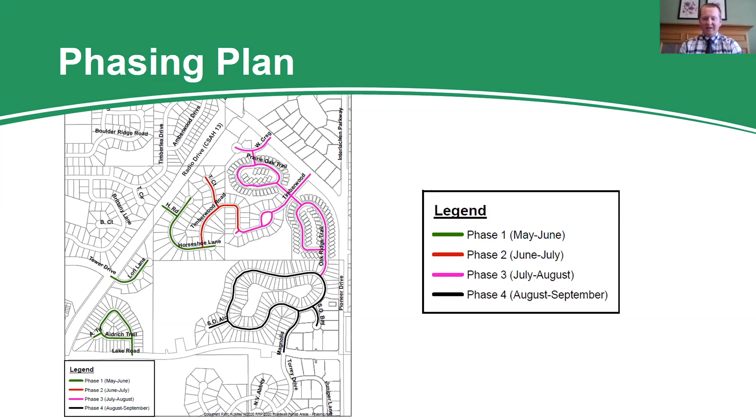So when we talk about phases, this is what we can expect. They'll generally take 6 to 8 weeks per phase, depending on weather and other factors. The first week generally consists of putting up signs for traffic control and doing utility repairs with any manholes. Some phases have more of that than others.

After that's completed, we get into removing and replacing damaged curb. Removing the curb takes a couple of days, and placing the curb takes a couple of days, but really the longest time is waiting for that curb to cure, which usually takes about a week.

While that curb is curing, we don't allow vehicles to drive over it. So if there's new curb in front of your driveway, you'll have about a week where you won't have access to your driveway. After the curb is set, we get into removing the pavement, grading the gravel, and placing the bottom layer of pavement.

That will take a week or two. After the bottom layer of pavement is placed, we will patch the driveways if they were damaged during curb replacement. Then we get into topsoil restoration and seeding, and finally the top layer of pavement will be placed.

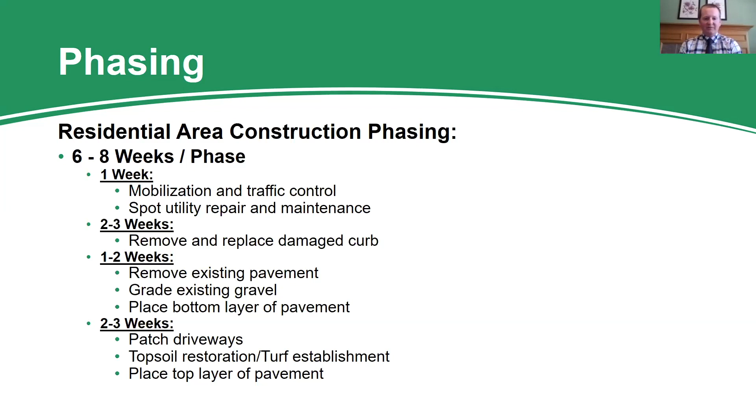We've shown this map at a few different meetings, but if you haven't been to those, this shows generally what the proposed improvements are going to be. This project will consist of a handful of different things: some trail rehabilitation, some new trails, some spot curb and mill overlay areas, spot curb full depth areas, full depth pavement areas, and full curb and full depth pavement areas.

The full curb and full depth streets being rehabilitated include Horseshoe Lane, Timberwood Court, and Timberwood Road between Horseshoe Lane and that small cul-de-sac. The spot curb and full depth street construction includes Lori Lane, Aldrich Trail, the rest of Timberwood Road, Prairie Oak Trail, and Oak Ridge Trail. The mill overlay area includes Savannah Oaks Lane, Savannah Oaks Bay, Magnolia Lane, and Savannah Oaks Alcove.

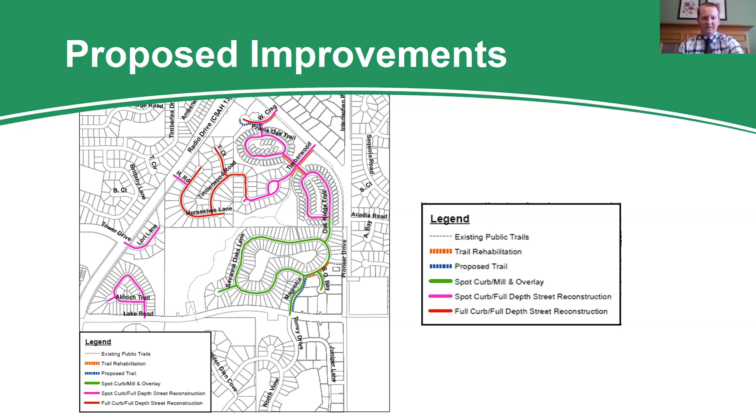We'll show you a quick video here showing the general construction process, and I'll go into these in a little more detail after the video.

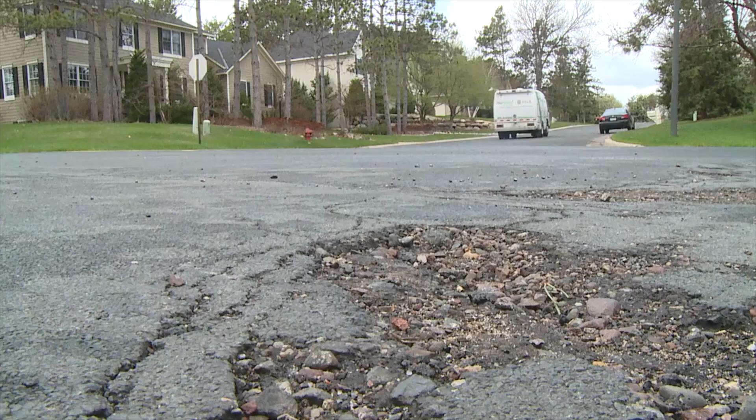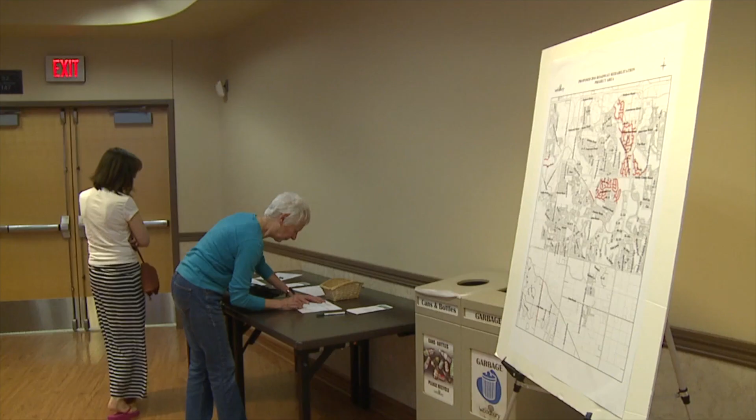Every year, the city improves sections of neighborhood streets in a variety of areas of Woodbury. Most of the roads are in residential areas, which is why city staff conducts a series of neighborhood meetings, open houses, and public hearings related to the Roadway Rehabilitation Project. Residents attending these meetings have the opportunity to learn about the construction process, special assessments and funding, how it will impact them, and ask questions about the project.

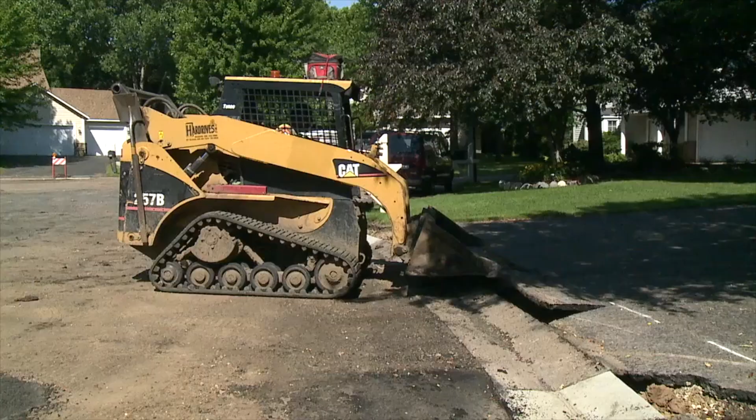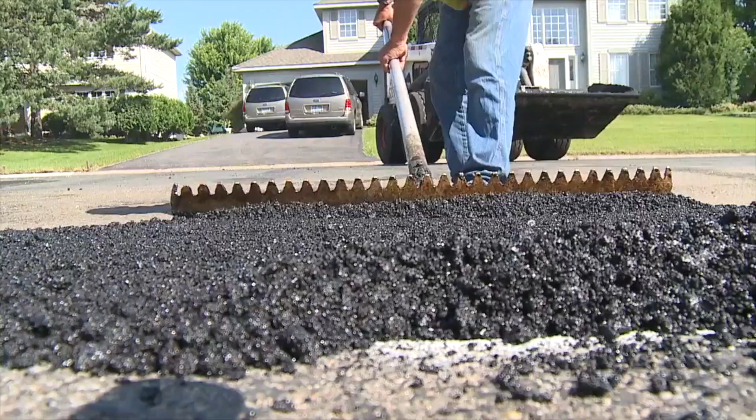Special assessments are a charge imposed for improvements that benefit nearby properties. The amount of the charge bears a direct relationship to the benefit the property receives and is based on the city's assessment policy. Assessments are used as a partial project funding source in addition to general tax revenues and other sources. Once the project is formally approved by City Council, construction begins.

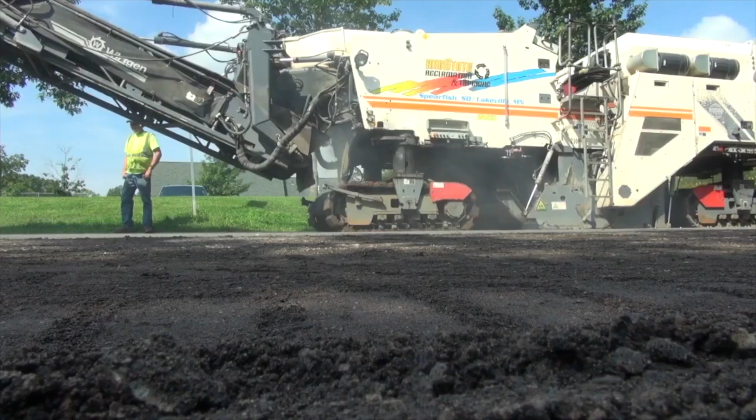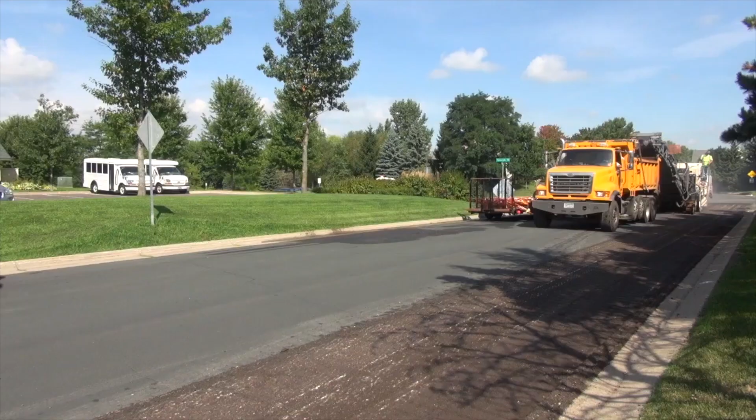The first step in the process is removing portions of the old pavement. A milling machine proceeds slowly down the street as it removes the top surface of the pavement, leaving a rough but drivable surface. In most cases, the roads remain open to traffic through the milling process.

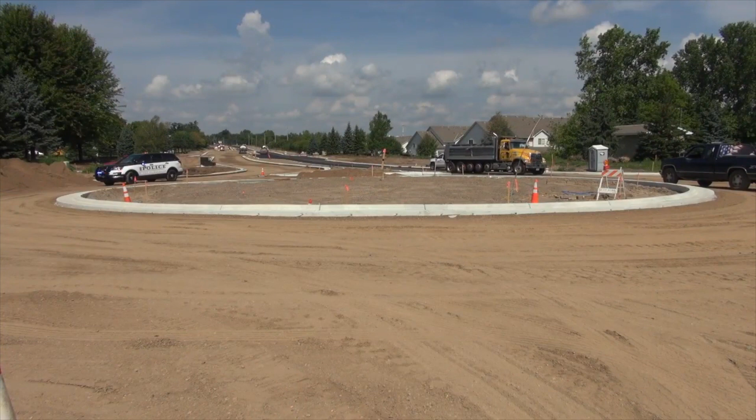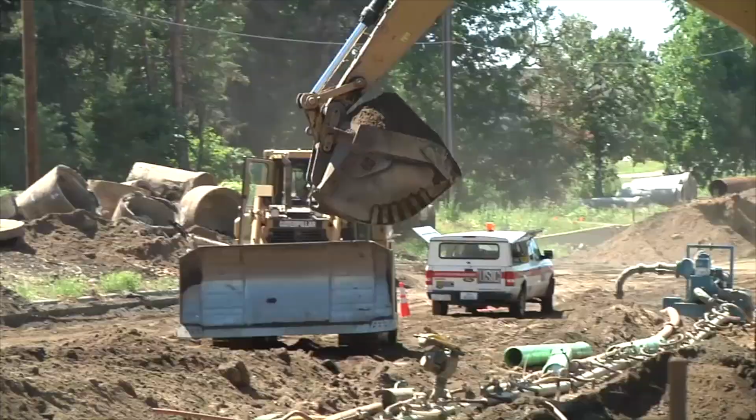Depending on the location of the project, utility improvements might be done in conjunction with the roadway work. These improvements include sewers, water mains, natural gas lines, and communication cables. Utility work requires extensive digging and usually results in temporary lane or roadway closures. Motorists should be aware of detours in these areas.

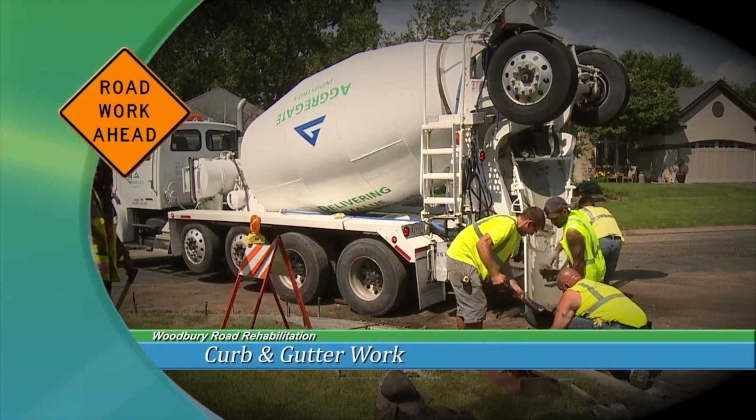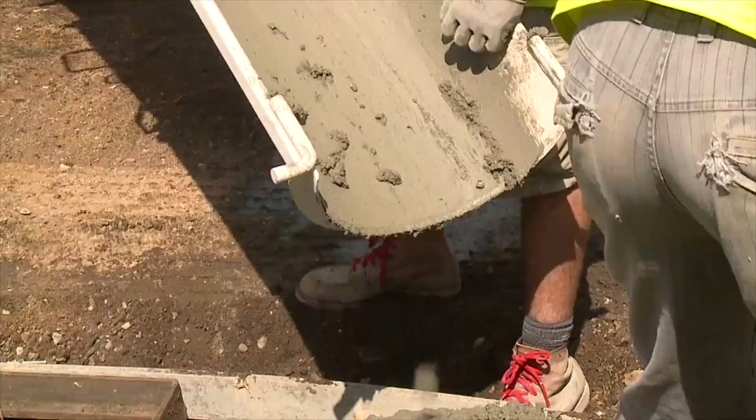All projects involve curb and gutter work. Approximately one week before curb construction, sections are evaluated and marked for removal. If your curb needs to be replaced, you will be notified and given information on how it will impact your residence.

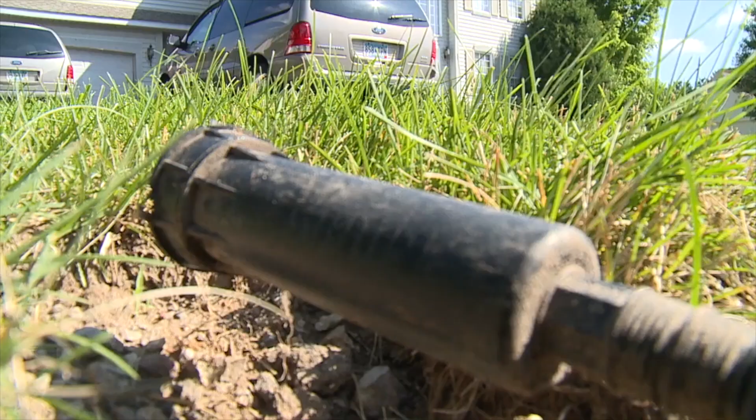During construction, any irrigation systems, dog fences, or other private features within the right-of-way will have to be moved by the property owner. Asphalt driveways damaged during curb replacement will be patched. Damaged concrete driveways will be removed and replaced.

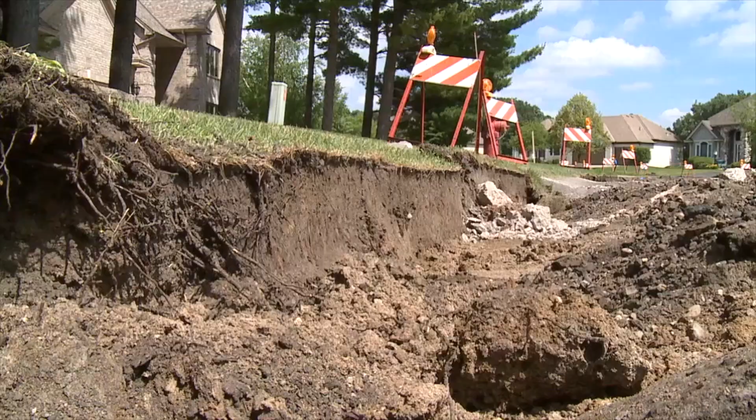Curb work will also impact your lawn. The contractor will replace disturbed areas with seed and hydro mulch, and will care for the area for 30 days. Residents are encouraged to water and care for the areas to achieve the best results. Once curb work is completed, it cannot be driven over for 5 to 7 days.

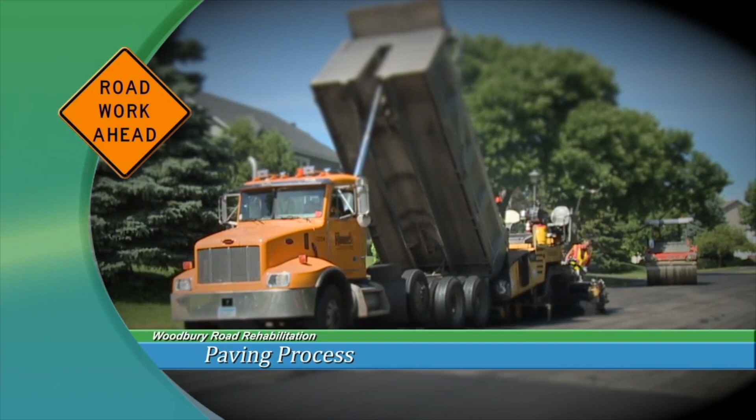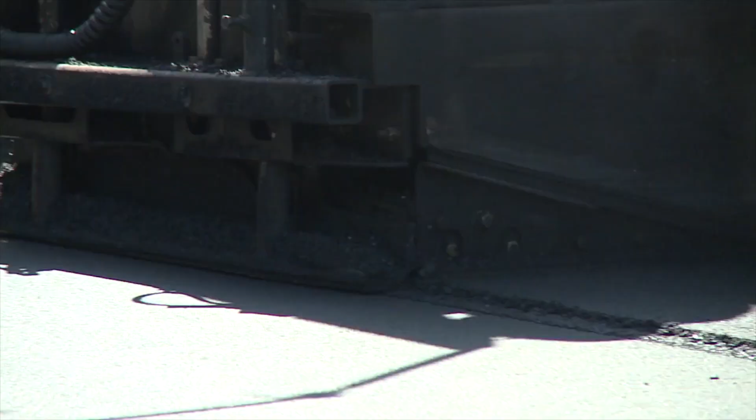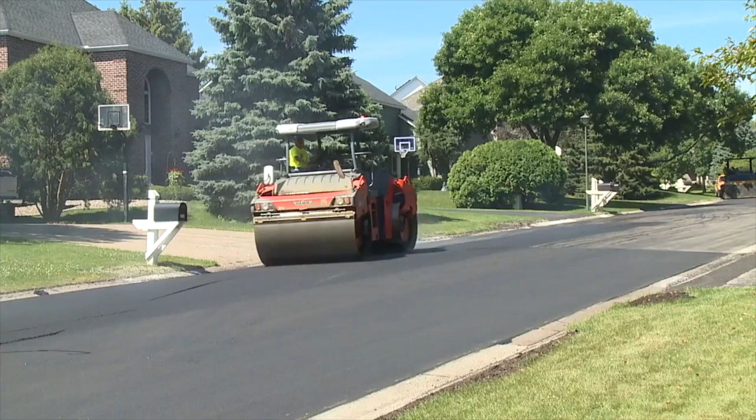Prior to final paving, the street surface will be thoroughly swept. After this step, the final pavement process will begin. Before the new asphalt is laid, tack oil is applied to the road. Residents should avoid driving on the tack oil because it can stick to driveways and vehicles. With the tack oil in place, crews will then begin the paving process. After the new asphalt is rolled and has cooled, it is immediately ready to use.

If you have any questions regarding the project process, assessments, or the scope of the project proposed for your neighborhood, please contact the City of Woodbury Engineering Department at 651-714-3593.

So we're going to go over just some things to expect with construction. Obviously, we have a schedule, but that's subject to change based on weather or other unforeseen conditions. I think we all kind of understand with this COVID, there's some unpredictability that we don't know exactly how that's going to affect the construction schedule.

There will certainly be some inconveniences with this construction. If you are having curb replaced in front of your driveway, there will be about a week where you're going to lose access to pull in and out of your driveway. We're going to try to get in and out as fast as we can, and we're going to try to communicate that as best we can so you're aware of it.

And if you have concerns with things like that, for sure this project hotline, that again is in the bottom right-hand corner, that's going to be the number to call if you have some mobility concerns, things like that. Feel free to call that hotline, and we'll have staff that can meet you out there and address whatever concerns you have.

During construction, it's going to get dirty. When we remove the pavement, it's going to be dusty. We'll have the contractor watering the area, but you can all imagine the days in the middle of July when it's 80 and sunny, it doesn't take long for the gravel to dry up and create some dust. So likely you're going to have some dirtier cars.

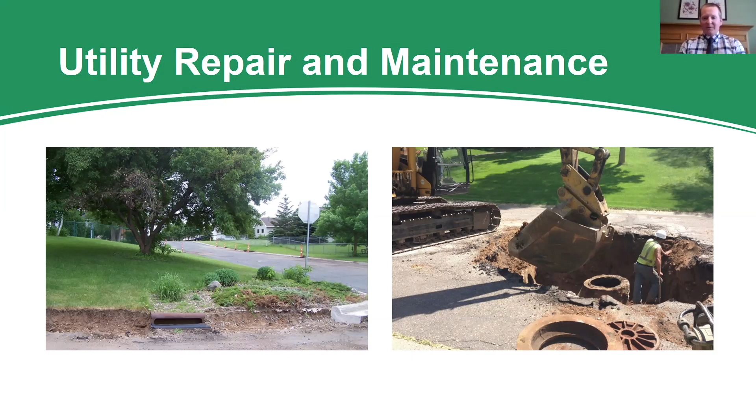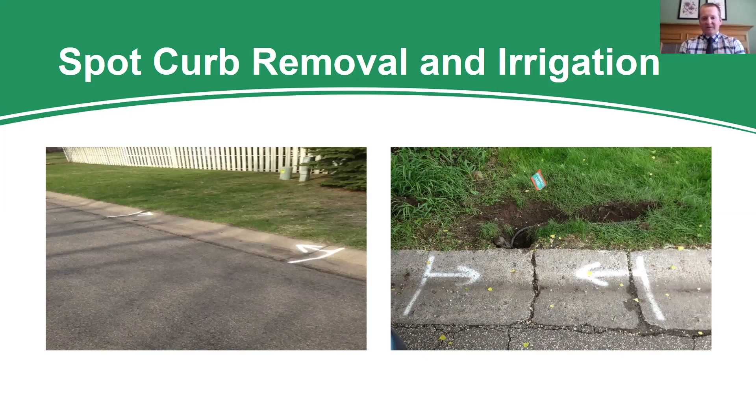That includes dog fences, irrigation, any landscaping. So if you'd like to protect those, it's very important that you go ahead and remove them and pull them back to at least 3 to 5 feet behind the curb. And again, if you have questions, feel free to call the hotline and they can meet you in your front yard and go over clearly what the expectations are and how to protect whatever utility or landscaping you have. So these are some pictures you'll see for the spot curb removal.

The road is going to be a little dirty during this process. They'll be pulling out the curb, putting it out, and loading it into trucks. But there will be some time where you'll see piles of concrete curb throughout the street.

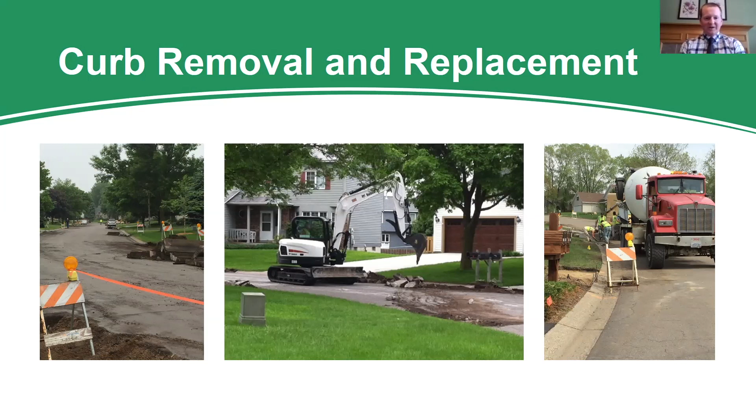That picture in the middle, that's one of the pieces of equipment we need to be aware of. If you want to drive past a vehicle like that, try to make eye contact. They'll be looking for vehicles, but don't assume they can see you. Try to pass as far away from those as you can. That's really the best way to stay safe and prevent any accidents from happening.

When we are going through the full curb area, we will need to remove mailboxes for a short amount of time. When we do remove the mailboxes, we will be providing temporary mailboxes. If you need a temporary mailbox, it will be included in your door hanger notice that was either mailed out or will be delivered later, and it will show you where our temporary mailboxes will be located. If you're uncomfortable having your mail at that temporary mailbox, I believe you can contact the post office directly and they can hold it for you to pick up at the post office, but that would need to be coordinated between the residents and the post office directly.

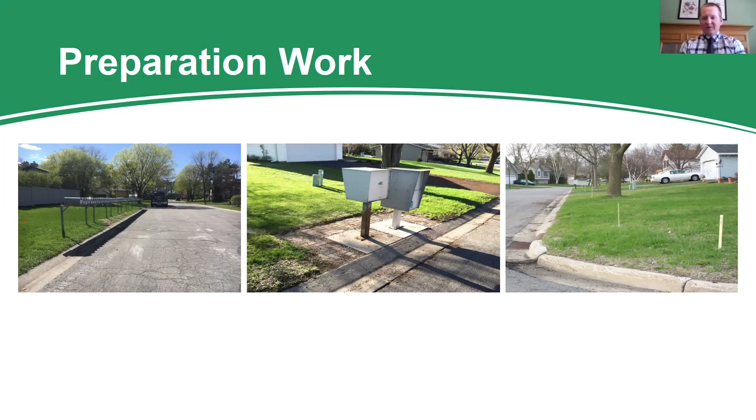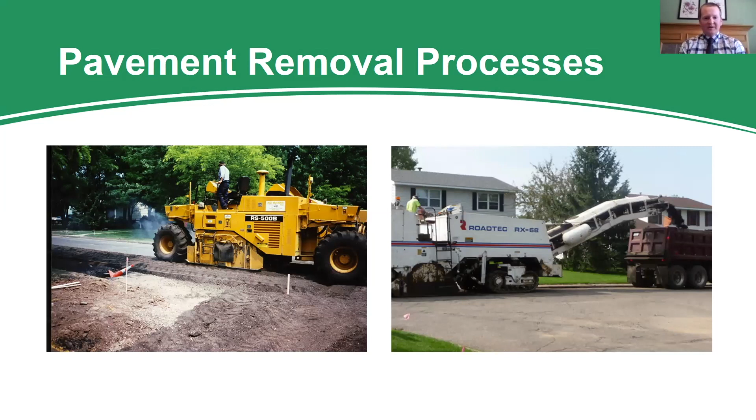There's a string line that the machine follows, set a couple feet high, that's going to be put in your yard. Please don't take that string down. If you need to get through and have concerns about stepping over it, call the hotline or see if you can get a hold of one of the contractors to see if they can put this rope down for you for a short amount of time. The machine uses that string to guide it, and it's very sensitive, so if that string is impacted while the machine is in operation, it can hurt the production of the curb and require the contractor to redo it.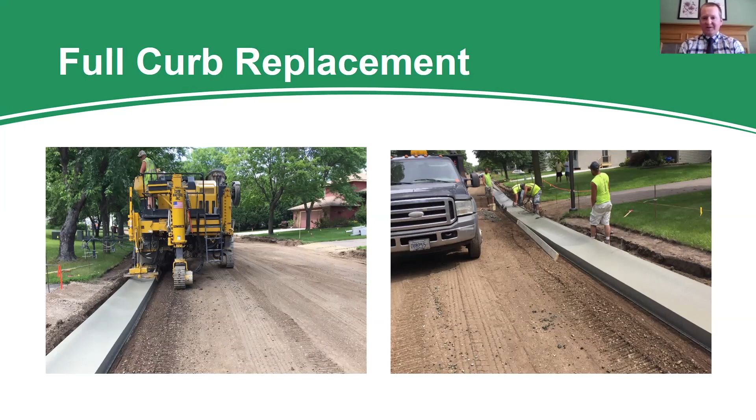This patch will be placed to help bridge the gap. If you have a concrete driveway in a spot curb area, generally they can protect the concrete driveway. Not always, but usually they'd be able to put in the new concrete curb without impacting the driveway. If you have questions or concerns about that, the hotline number would be the best one to call.

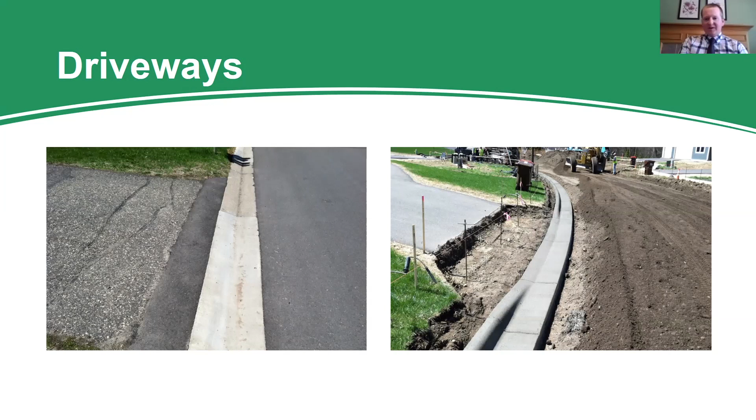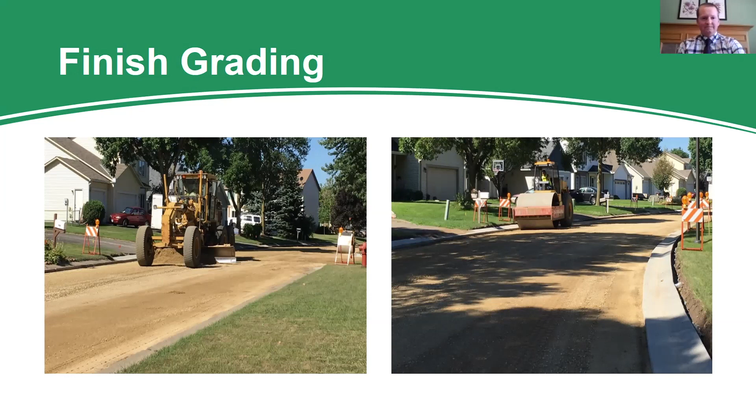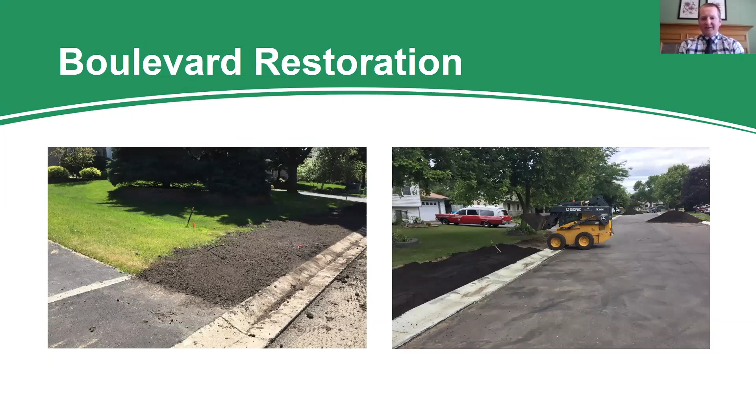These two pictures show what the boulevard restoration looks like after the full curb area. They'll be putting in new topsoil anywhere the existing boulevard has been impacted.

It's something we do ask for homeowners if they really desire a yard with good grass growth, that they help us out a little bit and take on some of the watering and weeding. The contractor will be responsible for it, but it's challenging for them when they have so many yards and they're on several projects throughout the metro. So if you do desire to see that grass growth quickly in your yard, we do ask for you to try and help out with watering and weed control.

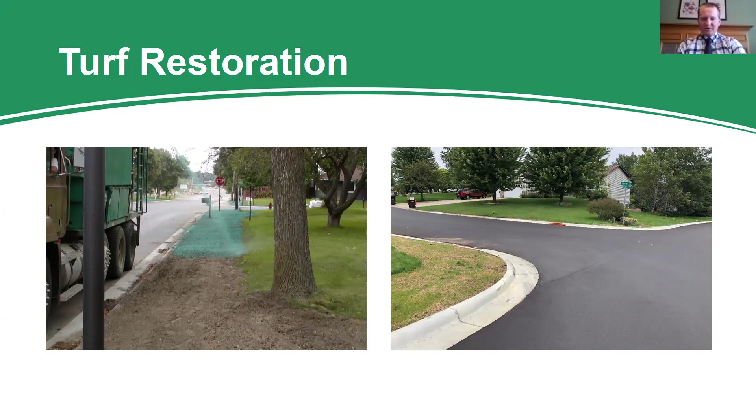So this kind of summarizes what I was just mentioning. The contractor is responsible for the establishment of seed for 45 days after installation. After the grass is accepted, it becomes the responsibility of the property owner to maintain. We encourage you to help us with the turf establishment. If you take some effort to water and do some weeding, it's going to help a ton, because frankly, it's challenging for our contractor to put as much care into the yard as it would be for any of the homeowners too. So we do include a watering guide if that's something you're interested in to help get the grass to grow. If you are looking to water it daily, that is an option, but we do require watering permits to be acquired from the city.

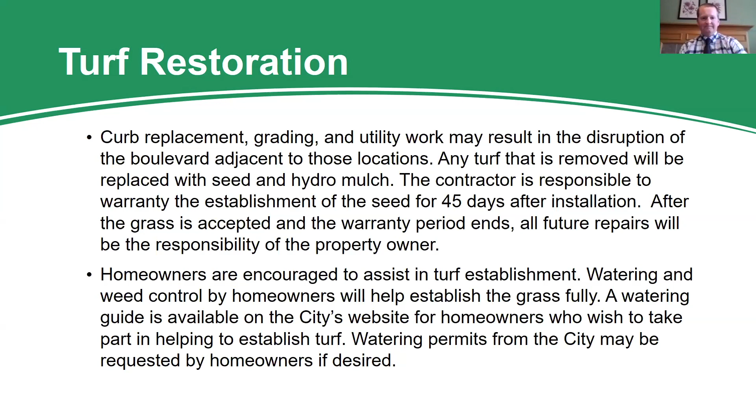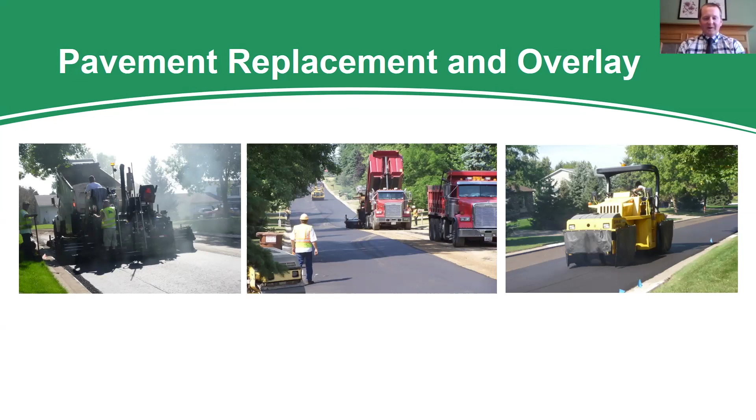One of the other things we see often - that picture in the center is showing what the paving operation looks like on the day. They'll pave one lane at a time, and while they're paving, they put a tack coat on the bottom layer of pavement. This tack coat helps keep the top coat and the bottom coat of pavement together, so in order to do that, it has to be very sticky. It sticks to everything, including car tires, concrete driveways, garages, everything else. So do your best to not drive if you see this tack coat. If you have to drive across it, go very slow so that it doesn't spray up onto your car at all. Don't pull into your garage - if you have an asphalt driveway, feel free to park in the driveway, but don't go into the garage, because very likely you'll get that tack coat onto the garage floor and it can be very difficult to clean. So drive on the new asphalt as much as you can and avoid driving on the tack coat.

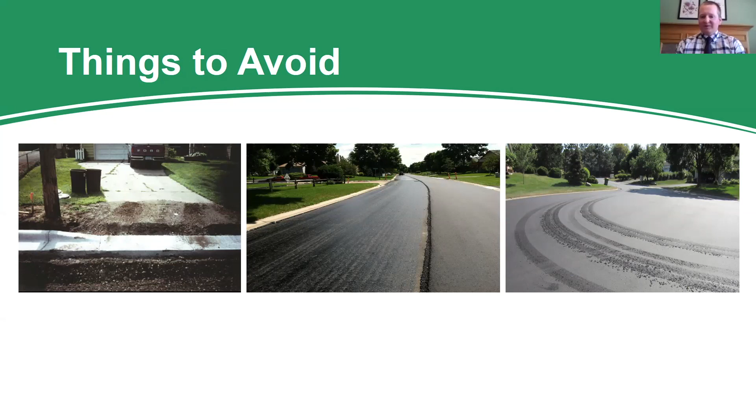Don't pivot your wheels when the car is not moving. If you're backing out of your driveway, keep the car in motion while the tires are moving. If you stop and pivot, you'll see some scuffs in the pavement. They won't hurt the pavement, but it'll scar it for a couple of years, and there's really no way we can fix those. It's just an aesthetic thing we'd like to avoid if possible.

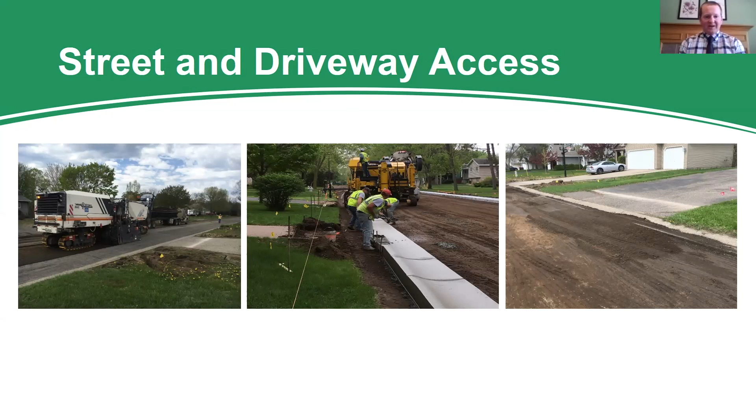We will maintain access throughout construction, but I want to emphasize access is not the same as it was before. Expect delays, narrow streets, and construction vehicles throughout the summer. Be as cautious as you can around the crews and equipment. These guys are working as fast as they can, and the more you accommodate them, the quicker they can finish and everybody will be happy.

Now for some frequently asked questions, hopefully covering most of what I've already discussed. On schedule, construction begins May 4th, starting with phase 1. The phasing sheet will be shared on our project website. We're expecting substantial completion sometime in October.

As I said before, the schedule can be delayed or changed for a variety of reasons. The best way to stay up to date on construction progress is to sign up for the city's InTouch email notification service.

Also, we usually schedule construction around the garage sale, which happens in May. This year it's going to be happening in September, as far as I know, as long as that doesn't change again. We'll be working with the contractor to minimize construction impacts during that garage sale.

Streets will be open during construction. We will maintain a gravel section for full depth replacement areas, or a rough pavement surface in the mill and overlay areas. That said, I would expect some delays.

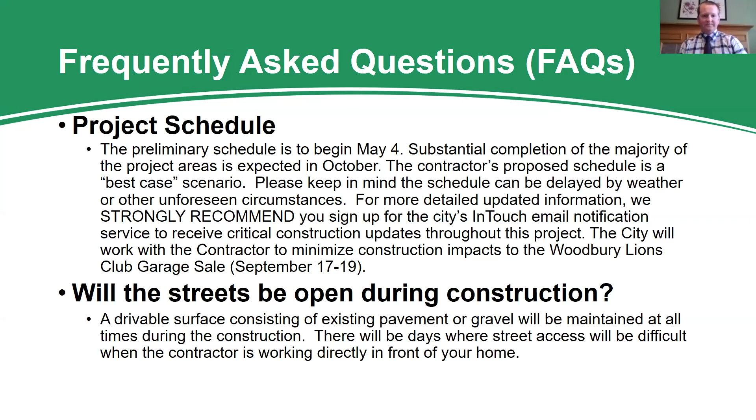The contractors' anticipated working hours are from 7 a.m. to 7 p.m., Monday through Saturday. They are allowed to work from 6 a.m. to 10 p.m., but we generally try to keep them within 7 to 7. One reason we'd let them start a bit earlier or finish later is paving operations — if it's 7 p.m. and they have an hour of paving left, we'll generally let them work until 8 p.m. to finish, rather than have them set up again the next morning and take most of the morning to do what could have been done in an hour.

Driveway access during the project: if you're in the spot curb area, you'll likely have driveway access throughout construction. If spot curb is replaced in front of your driveway, you'll likely be able to park right outside your front yard. If you're in the full curb area, you'll lose driveway access while the concrete cures, roughly a week, and we'll let you know where to park to minimize disturbance to the project.

One common question is about bringing home groceries. You're certainly able to temporarily park in front of your house to unload groceries, drop off small children, or similar — just a few minutes at a time — as long as the contractor isn't working directly in front of your house. If it's a short, five-minute thing and there's no construction activity happening there, go ahead and park for a little bit to unload the car or do what you need to do.

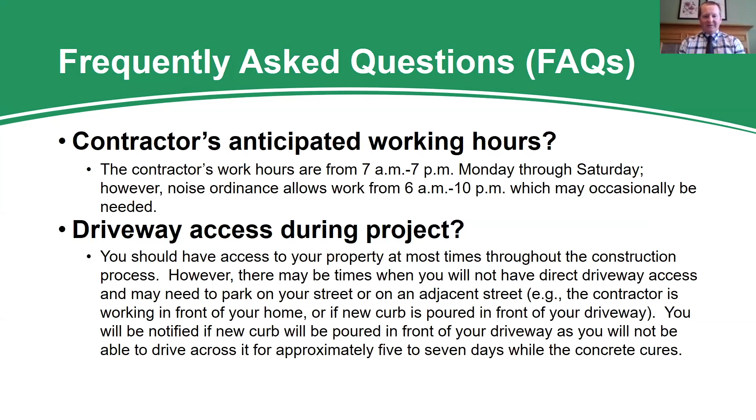Another big thing we deal with is irrigation systems, dog fences, and other landscaping within the city's right-of-way. The city right-of-way extends roughly 12 feet behind the curb, giving the city room for essential infrastructure, various utilities, and in some areas a trail throughout the neighborhoods.

As noted in the capitalized text at the bottom, the city or contractor will not repair or replace any private utilities damaged within the city's right-of-way — that's city policy. If you have concerns about irrigation systems, dog fences, or landscaping, please call the hotline. If those are damaged, we can't replace them, and marking them will not protect them from being damaged.

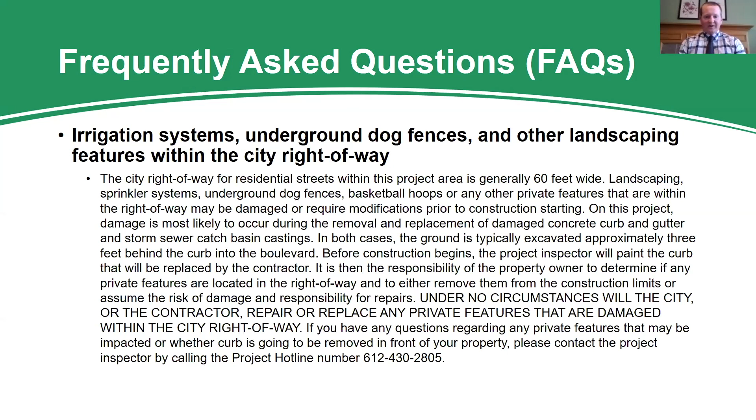If you mark irrigation systems or dog fences in the full curb area, the contractor will have to work at least 3 feet back from them, since they aren't able to work around marked items. Again, if you have questions or concerns, the project hotline number is listed below, so feel free to call anytime.

Will the contractor offer residential driveway replacement? No, the contractor is not looking for that kind of work. These contractors are built to handle bigger operations than private driveway work. So as a result, they will do the driveway patching that's impacted through the concrete work, but they won't be working with any private homeowners to replace the driveways.

And the one thing that I'll emphasize is I would wait, if you're looking to replace your driveway this year, wait until construction is over in your area. We always hate when we have to cut into brand new driveways. So please wait until construction is over before replacing your driveway.

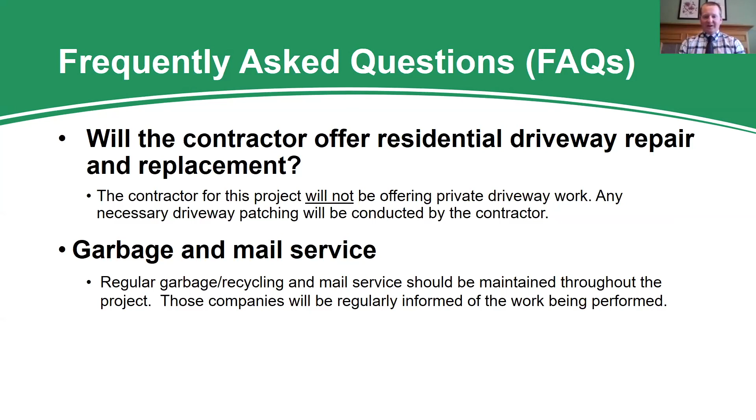And garbage and mail service. Again, we're aware that garbage day is on Mondays, and we'll do our best to work around the garbage schedule. Mail service will be maintained. Like I said, if you're in the full curb area, we'll provide temporary mailboxes. And if you have concerns about a temporary mailbox, feel free to contact the post office, and I believe you can pick up your mail directly at the post office.

And we also want to set some expectations here about what the pavement is going to look like next year. So it's certainly likely that we're going to have some cracks in the pavement. That's just something that happens, especially in a climate like Minnesota's, where we see really hot temperatures and really cold temperatures. The pavement expands and contracts, and when that happens, you see some cracks like this. It's completely normal and expected.

We'll go through and fill cracks as a city maintenance work. And the other item that we will plan to do next year is putting on a pavement rejuvenator, which will hopefully add some asphalt to the pavement and increase the life of the pavement.

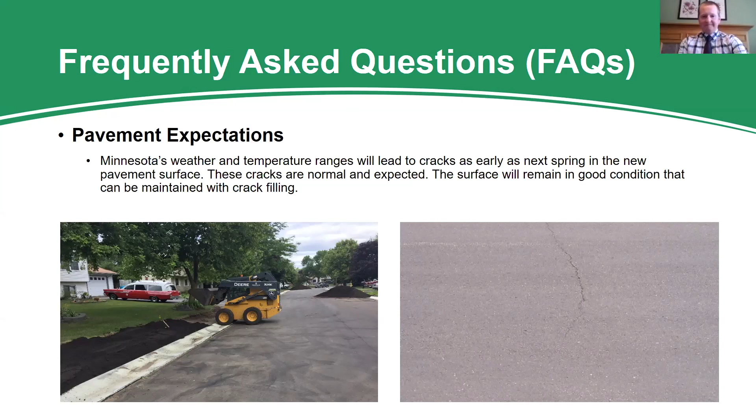So before I sign off here, I just wanted to bring your attention to a couple other road construction projects that will be going on in the city. So the county will be having a couple of projects here that are fairly extensive. Bailey Road between Woodlane Drive and Radio Drive is going to be converted to a 4-lane section of road, so that's going to have some pretty significant impacts in that area. Woodbury Drive between I-94 and Tamarack Road - this is the area up kind of by Sam's Club and Super Target. So that area, there's a very extensive project going on there, likely to have major traffic impacts.

And then again, for the second year in a row, MnDOT is working on the I-94, 494, 694 interchange project. And if you want to learn more about any of these projects, we'll have a link below to the city's website that will summarize what these projects are and how to learn more about them.